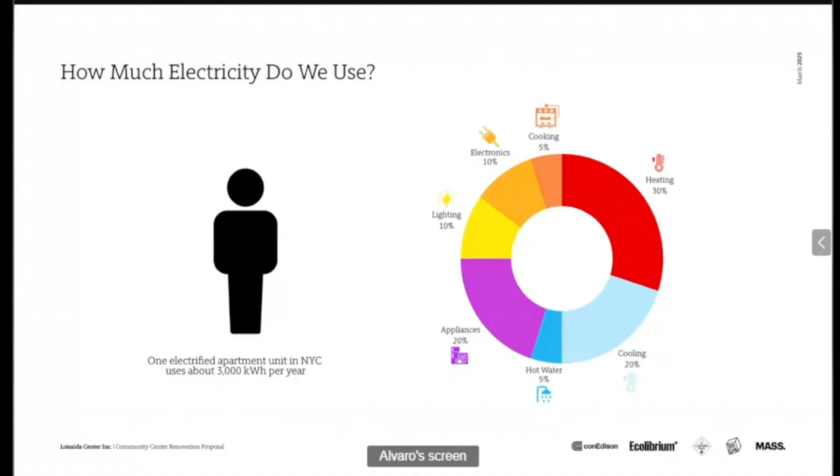To put that into a square footage point of view, it's about 144 square feet of solar panels that we need per apartment unit. Of course, that means we need our rooftops and public space canopies in order to yield the total quantity, if that's a goal.

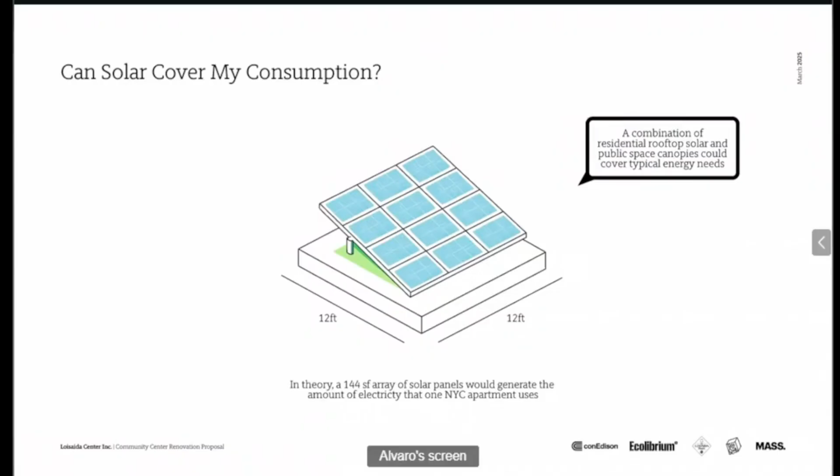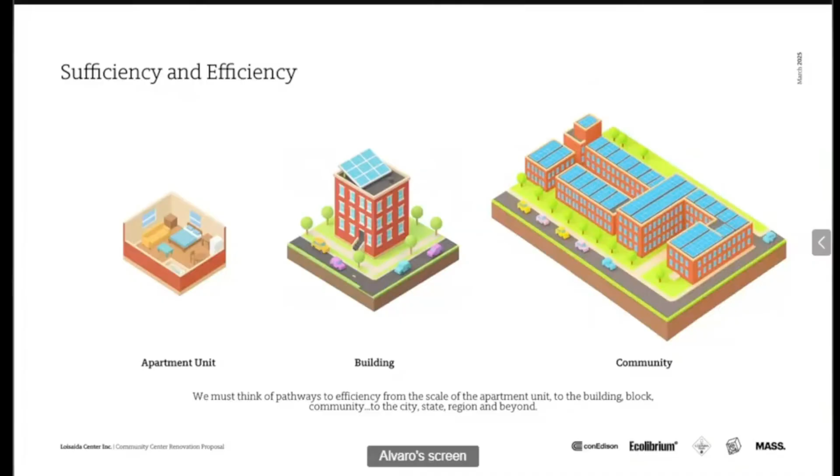And then the scale of impact, zooming from the single apartment unit to the building scale to the community scale, and unlocking all the symbiosis between those user groups.

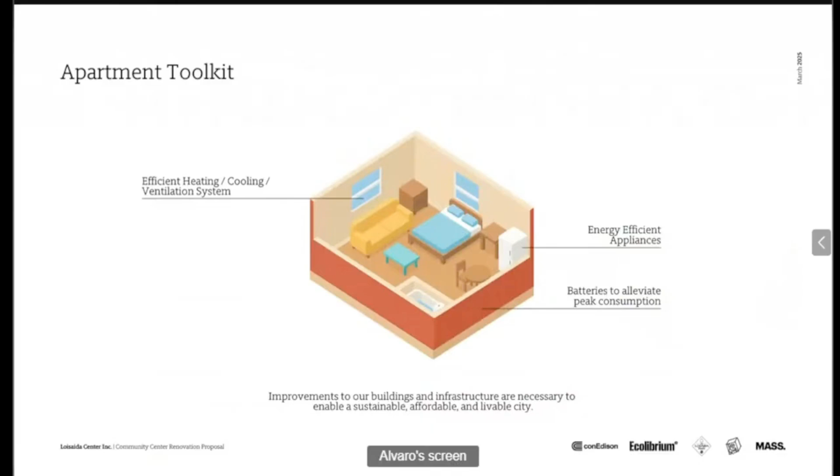Starting with the apartment toolkit, we have efficient heating, cooling, and ventilation systems, energy efficient appliances, and batteries to alleviate peak time consumption. At the building scale, we have...

exterior renovations such as rooftop PV, facade improvements, window improvements, interior heat pumps, energy recovery, and down to the landscape and urban materials: permeable pavements, stormwater capture, and increased vegetation, all to help efficiency and supply.

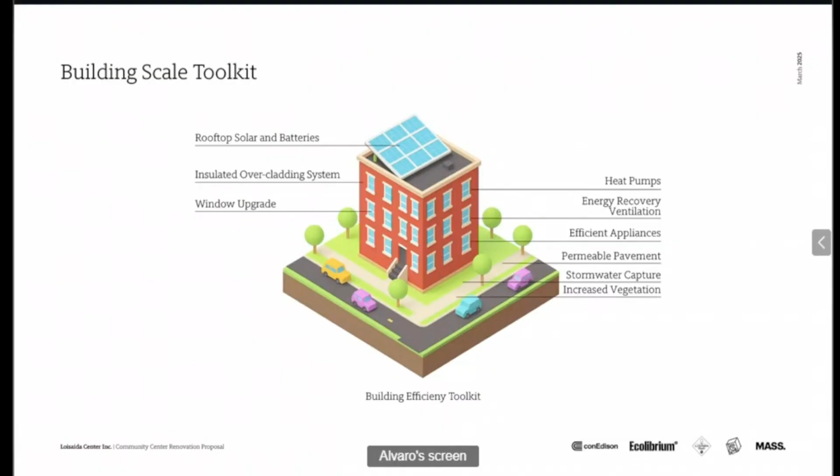And then scaling out to the community scale, just a single block. Once you combine these in aggregate, you have an ecosystem of energy where you can share and provide power to the grid, alleviating peak time demand and keeping everything running and keeping everyone comfortable in their living spaces.

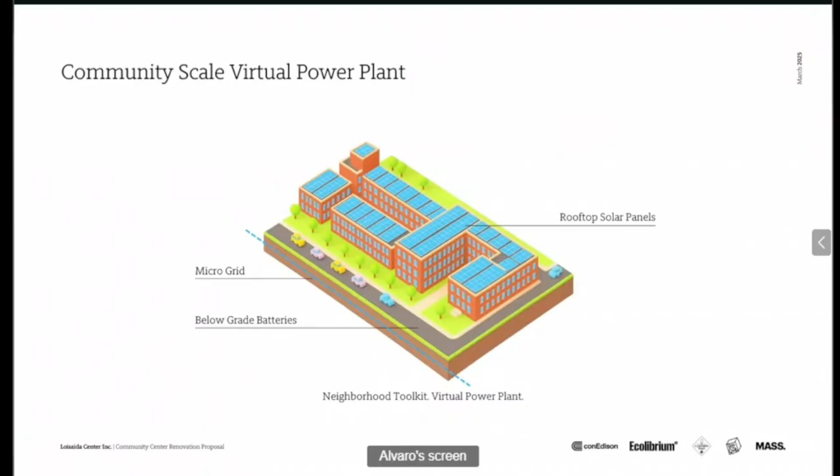Arthur and Grace are going to share a handful of pilot sites where we've been collaborating to implement some of these energy improvements and building retrofit improvements.

I'll be talking about some of the housing typologies we've been looking at. First, we've been looking at the garage and NYCHA housing adjacent to the Loisaida Center.

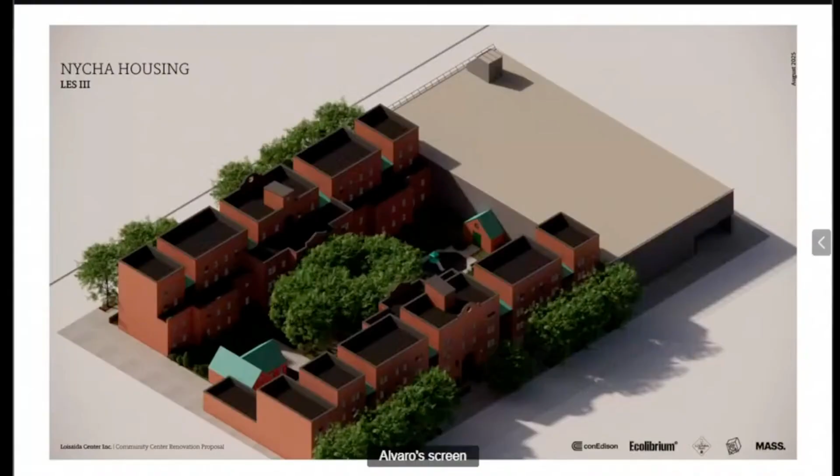Right now, we're going to look at the outer shell, the more facade or solar canopy retrofits. We're still in development of more internal building retrofit. But these are just imaginings of before and after.

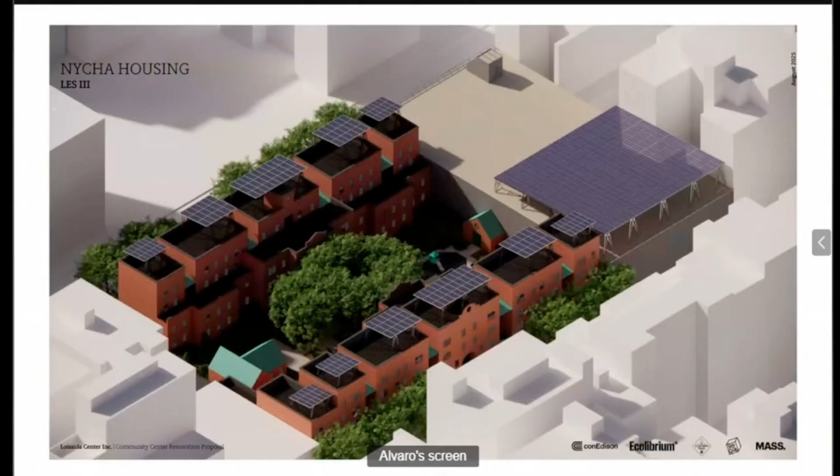So to utilize the square footage that we have on the rooftops, especially something like the NYPD garage, this massive surface that's completely vacant, could be optimized by putting solar panels on top and providing electricity, aggregating them to local housing.

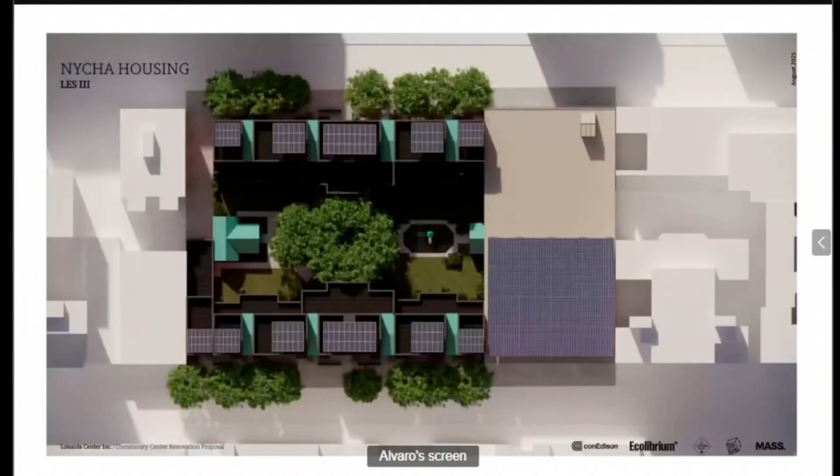This is a planometric view of this imagined solar canopy on the LES3 and NYPD police station, and you could see Loisaida on the edge there.

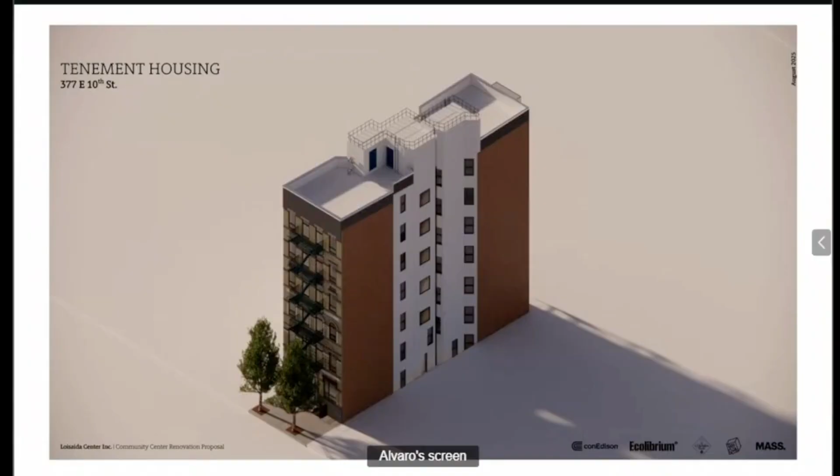Another typology we've been looking at is the dumbbell tenement housing that we see often in the Lower East Side. This is 377 East 10th Street. It's a building that's already been retrofitted, but it still has difficulty, especially with cooling, as the building was only retrofit mainly for heating.

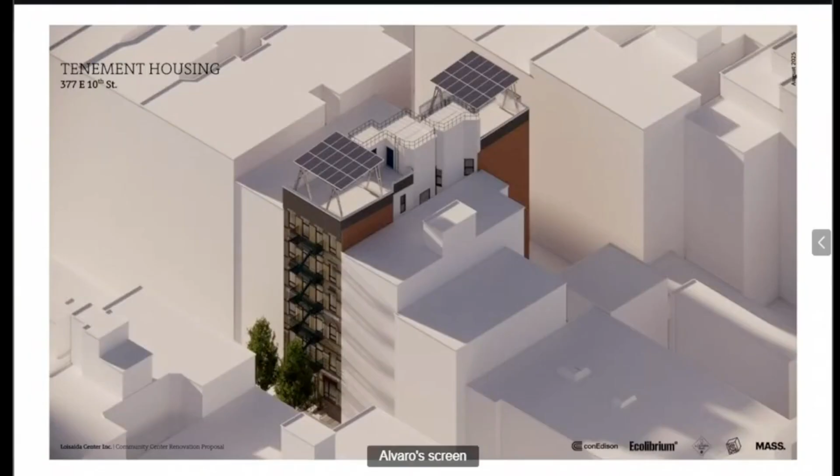But again, this is the kind of external look we could imagine: solar canopies on the rooftop. This is a planometric view.

And although we haven't fully realized what we could do in the interiors, it's all modeled and ready. So we've constructed these shells through collaboration with the energy modeling team, and hopefully these models could be brought to Cooper Union as well for future studies.

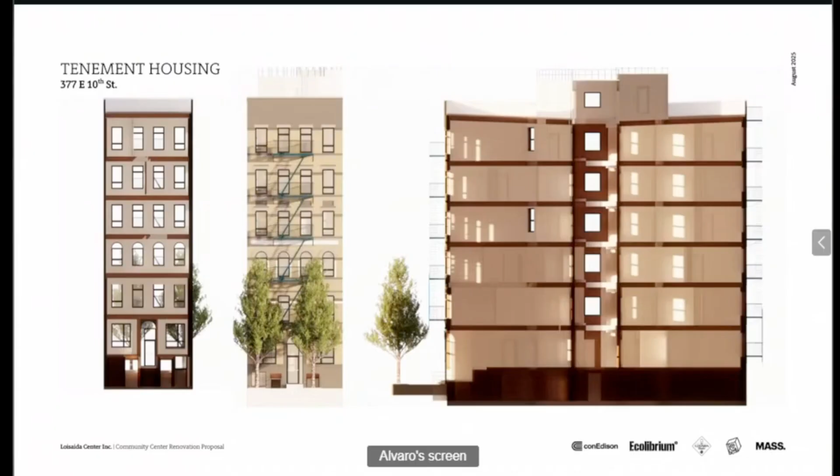But we've actually visited these sites and located different mechanical systems embedded into these buildings. As we said, this building has already been retrofit, so there's an ERV system and a natural gas boiler.

It's not the kind of electric battery or connected to the solar canopies that we hope to bring forward in the future, but these are the kind of systems that are in this building, and also water panel radiators, which are better than steam-powered radiators.

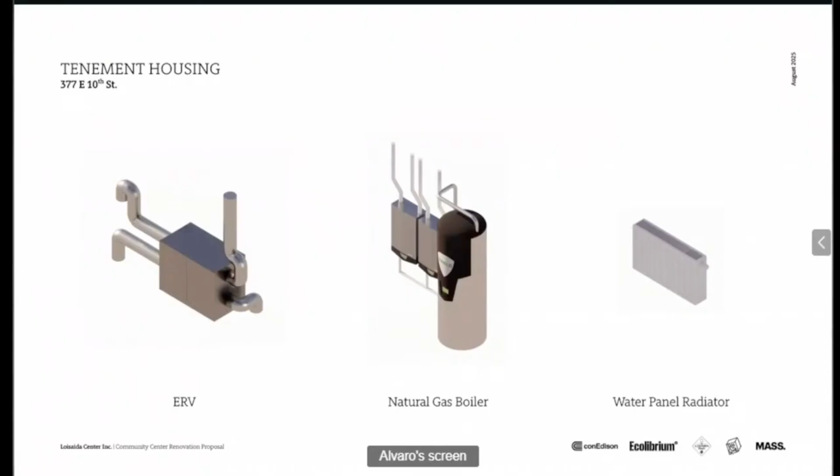In terms of site documentation, this is just an example of some of the things we do. We often go to these sites. We're grateful for...

Professor Baglione here. We visited 220 East 10th Street, and this was the cellar space. So this building's boiler is located at the basement, as most buildings do.

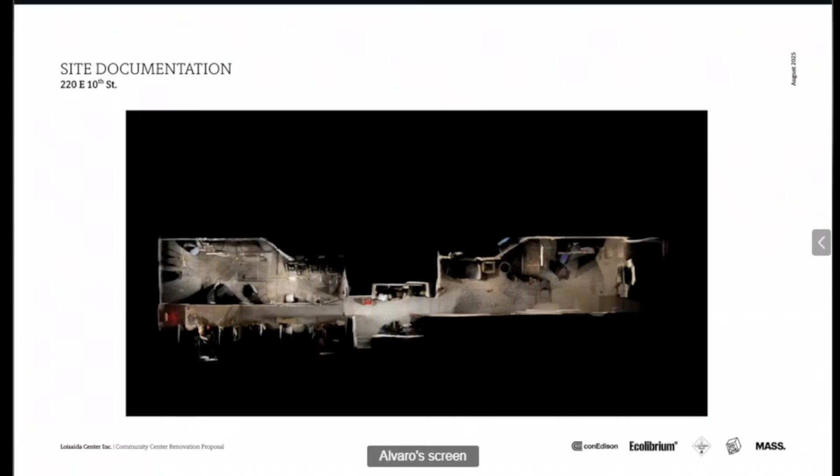But actually, 377 East 10th Street, because they're closer to a flood zone, relocated their boiler space to the rooftop. So this is just process documentation. Now we're going to move on to Dry Dock Park, so I'm going to pass it on to Grace.

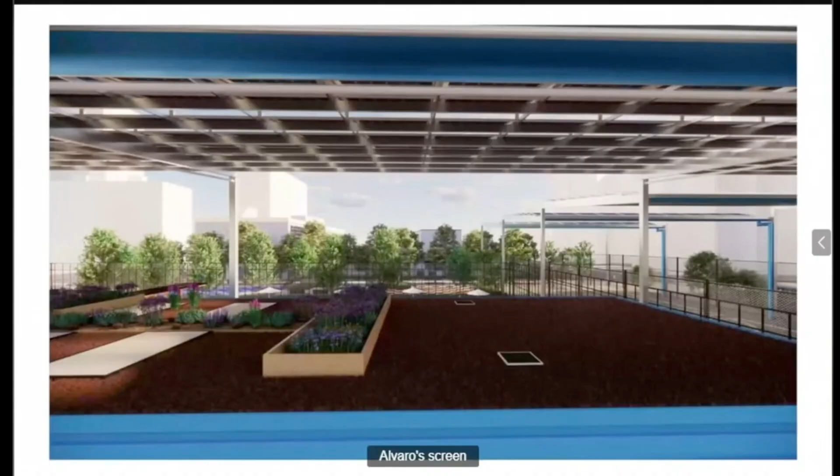Hi, so we've also been focusing on public typologies, looking at the Dry Dock Park basketball court and swimming pool building. Here we have an elevation of the building with a solar canopy elevated, where we could also use the rooftop of the building as a community garden, bringing shade also for people downstairs around the swimming pool area.

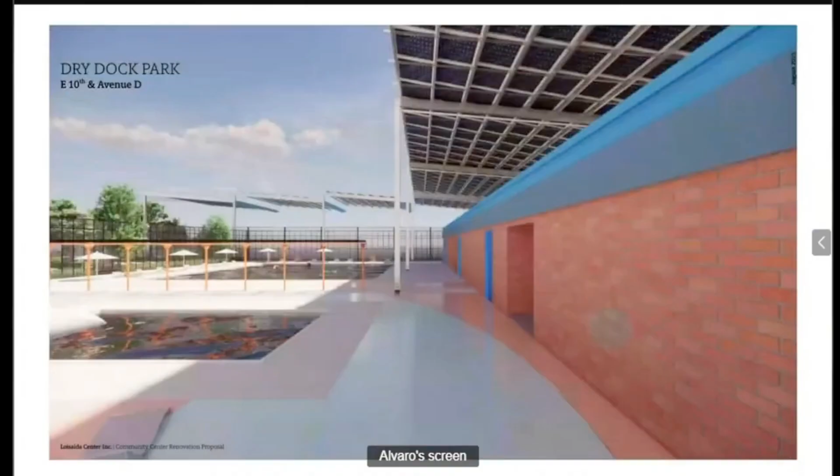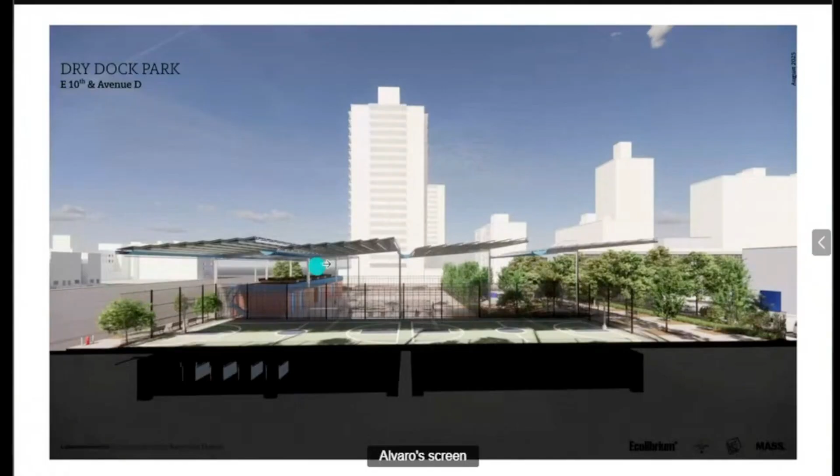But also having some ways to think about the water and electric storage units. Here we're looking at a section of the canopy where in between each panel we have gutters that...

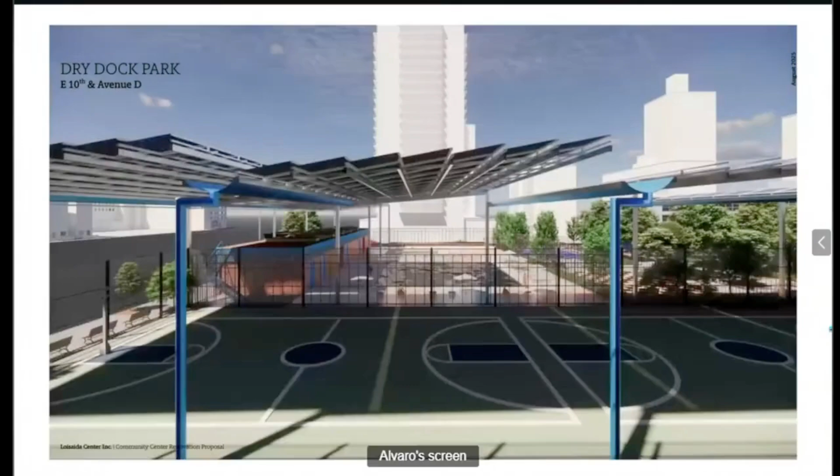catch water, stormwater, and it goes into the basement downstairs, keeping the catchment in water tanks, but also allowing for electric storage and battery through the flow batteries in the basement.

So these are all the models that we've been focusing on, and we're still developing more pilot buildings and parks. That's it. Thank you.